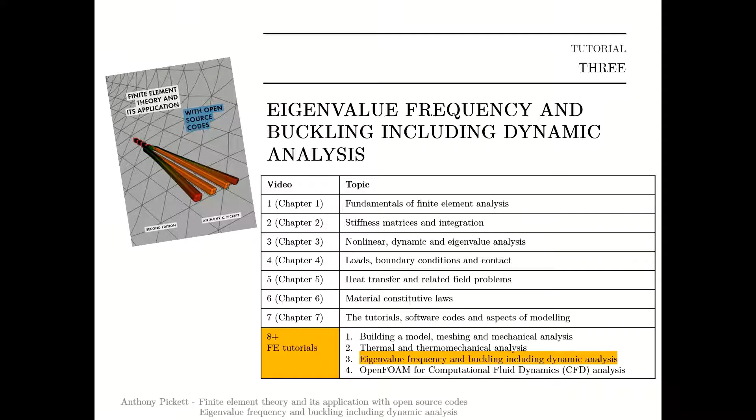I'll go through some description of the problems first of all and some background theory before moving on to the main part of the tutorial in using the codes. Then I'll do the frequency tutorial.

For this I've selected a tuning fork, an example I use in the book. It allows me to show you a little bit more of the CAD capabilities in FreeCAD. Then I'll move on and do a linear eigenvalue frequency analysis of this tuning fork and follow that with a dynamic analysis of the part using implicit direct integration, and can show you that we can get the same sort of frequency behavior as we can with a linear eigenvalue analysis.

Finally, then I'll move on to the buckling part of the tutorial, which uses a thin-walled box section loaded like a cantilever beam. One end of it is built in and the other end is loaded. I'll show you quickly how to build the CAD model, and then we'll do the linear eigenvalue analysis.

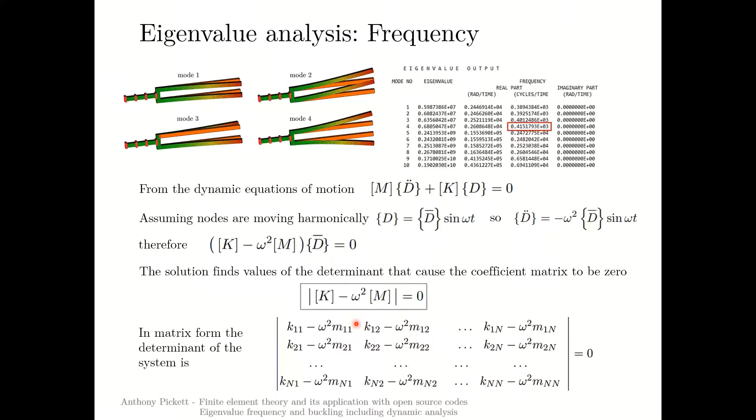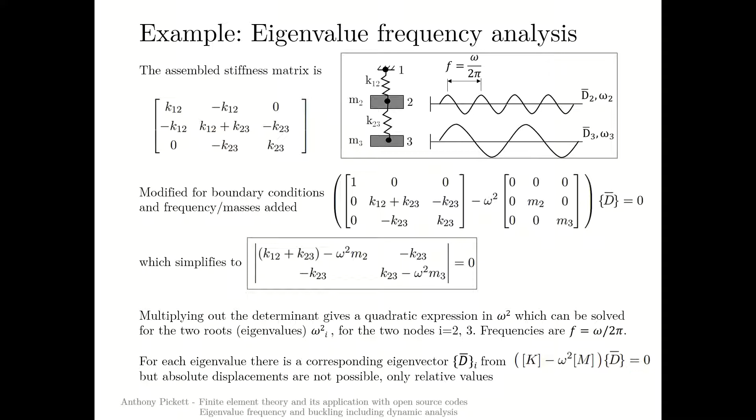Dynamic analysis can also be used for vibration problems. So, for example, this tuning fork could also be analyzed as a dynamic analysis, although you won't be able to very easily extract information like frequencies. But it can be analyzed, and also it can be applied to problems like the section buckling problem that we're going to be looking at later in this tutorial.

I did cover dynamic analysis in the video on lecture 3, although I tended to focus on explicit finite element methods. I rather jumped over this direct integration method that we're going to be using here. It was also used in tutorial 2 for transient heat analysis, so if you are interested, you might want to look back at that.

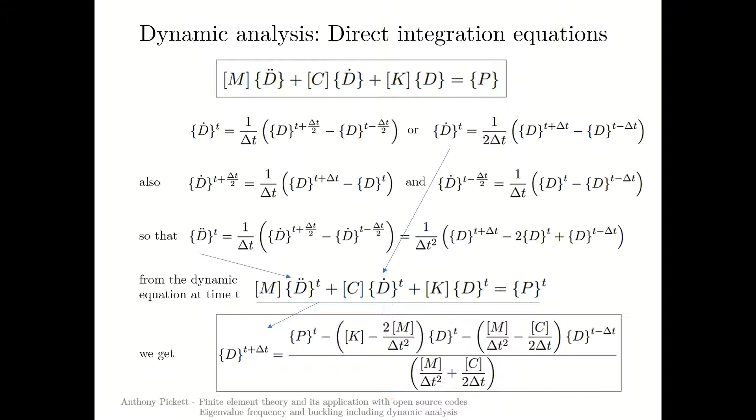On the next slide, I'll present the Newmark method, which applies these techniques. The direct integration method shown on the previous slide is used in Calculix, but in a slightly different form. It uses the Newmark method, which is actually a variation of the Hughes, or Hilber-Hughes-Taylor, HHT method. I'll quickly explain each of these.

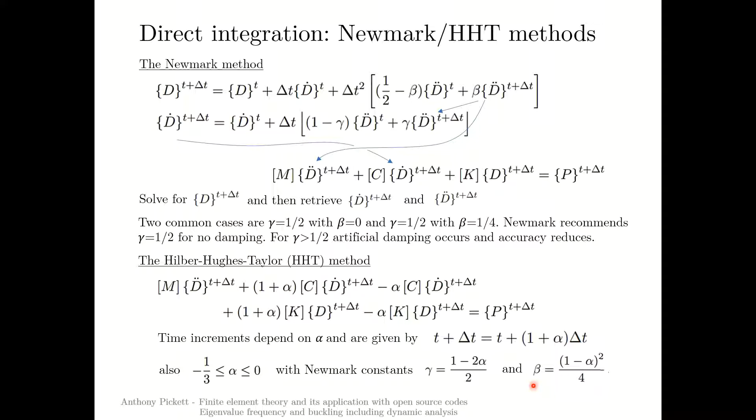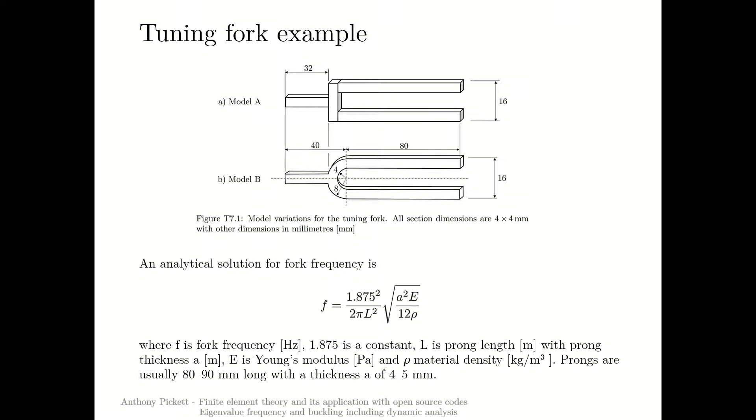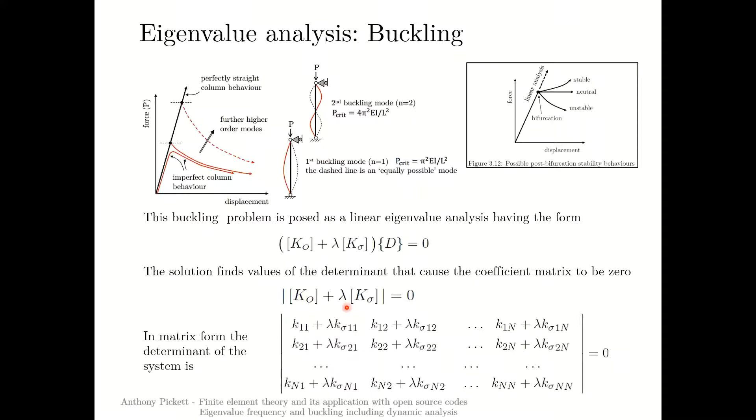That's a quick introduction. I'll move on in this tutorial now to use FreeCAD and Calculix for this frequency analysis.

First of all, I'm going to create the CAD geometry for this tuning fork. I've started FreeCAD - I'm using version 20, as you can see here. I had troubles with version 19.3; there's a known bug for frequency analysis with that version, so I'm using version 20. As I say, it's the beta version, should become the standard version soon. If you need to use this version, you have to download it from the FreeCAD website - it is not the standard, as I say it's the beta. Download the complete directory to your PC, and then you have to start the executable in the bin directory.

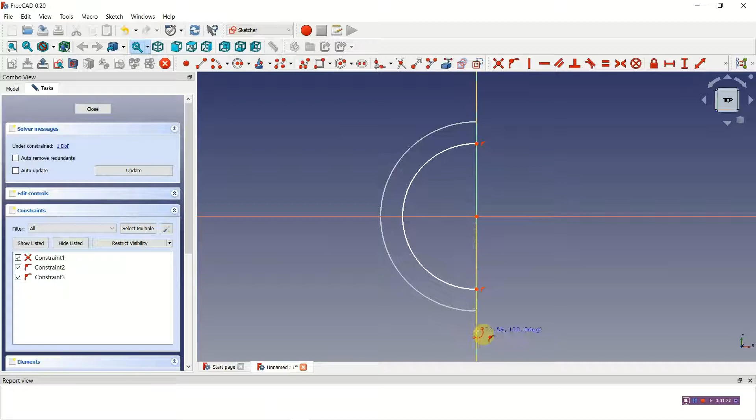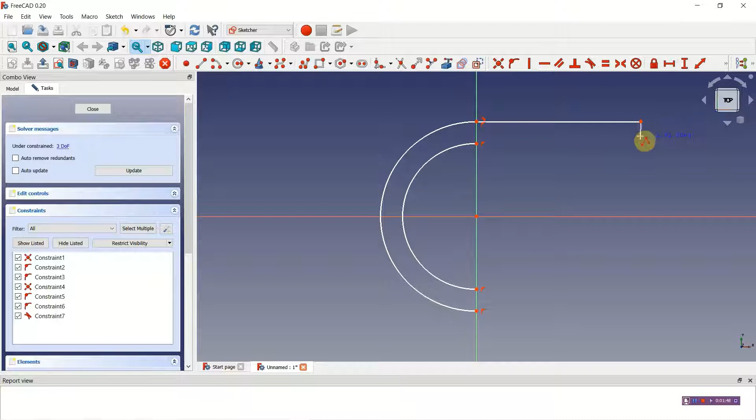Can we stop with the right mouse key? I'll then use this option here for a polyline. We create, go over the point - when it changes color, it means it's kind of tied together. Come out in a straight line to any point actually down. When it is a straight line, you get this vertical constraint appear. So I'll click on here again and then back to this point, and then with the right mouse key to stop that. I'll do exactly the same for the lower point.

And again, the right mouse key to stop the operation. If you get very close to the point, it will connect the two, and it has automatically put in the constraints for a tangent at these particular points. We've got the vertical constraints here. I'll connect these two with an equality constraint.

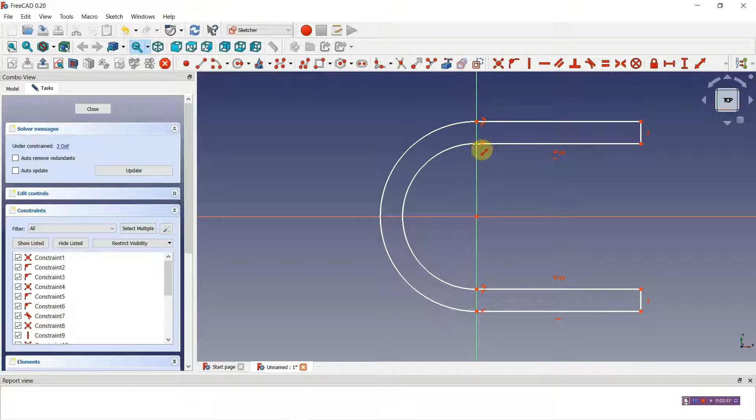And we can start dimensioning things. So I'll use this constraint here to specify that between this point and this point we have 8 millimeters.

And between this point and this point we have 16 millimeters. I'll specify that the length here from this point to here is 80 millimeters. Because of the constraint I introduced between these two, they both take, or both prongs as it were, take on the right length of 80 millimeters.

I'll create part of the handle. Just start with some point here, move out, trying to keep the lines vertical, and then back to this position here.

We could now use this trimming tool here to trim off these points. If you make a mistake, there is an undo option to correct things.

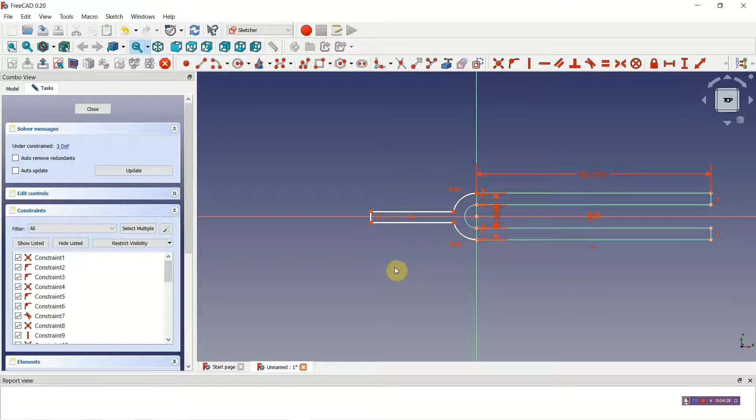They're connected. We want to have, well, they are parallel connected. Not sure on that.

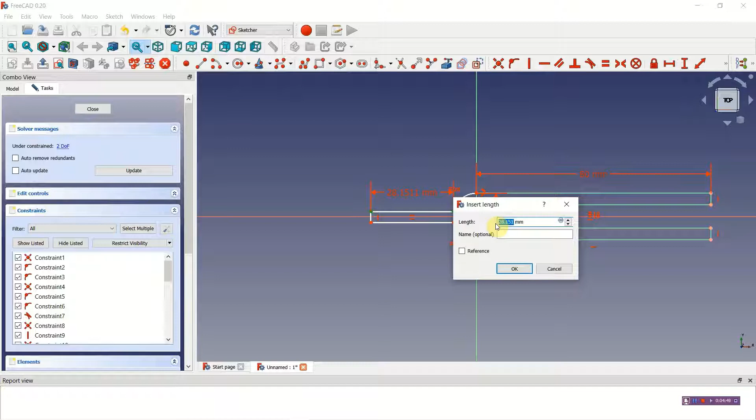Let's set the length here between here and here of let's say 35. I think in the original it was 40. Let's say 35. It doesn't make much difference.

And I'm going to create a handle, a little kind of grip at the end here using a circle. This is convenient for holding it. It's not really necessary for the frequency analysis or the eigenvalue frequency analysis, but it is convenient for a dynamic analysis I'm going to be doing.

So I'm just going to create something here. Sorry, I didn't do that correctly. Let me repeat that. From here outwards. And then I'll specify the size of that with the circle constraint.

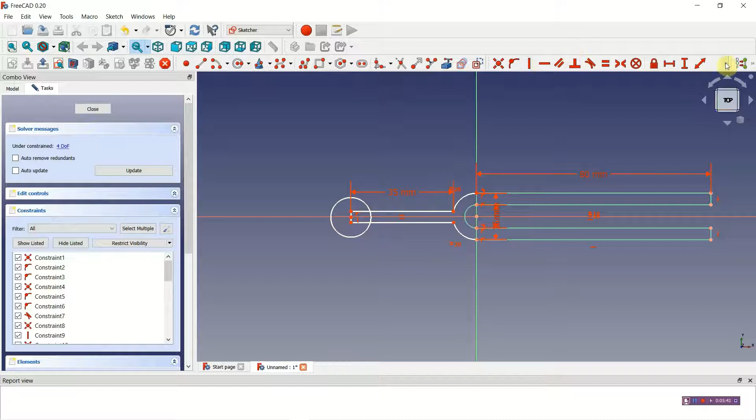We'll make it the radius, let's say 10. See how that looks. A bit large maybe. We'll make it 7.5.

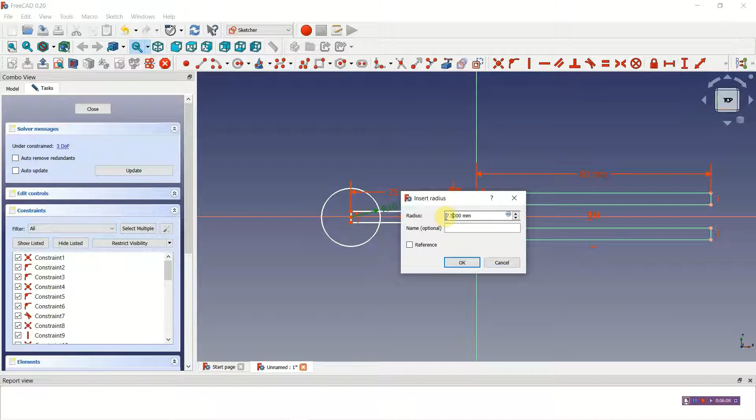Okay, again, we'll use the trimming tool. Sorry, here's the trimming tool to trim that. Right mouse key to stop the operation. I'll draw over that and then can just simply delete it with the delete key.

I need to make sure that this circle and also these two lines are really in the center. So I'm going to set a vertical distance between this point and this point, also between this point and this point of 2. So let me use this vertical distance constraint, which I haven't done properly, so I cancel that. I click these 2 points and then do the vertical constraint and put in 2 millimeters.

And I'll do the same between here and here, 2 millimeters. And I will do between the center of this one and here, also in the vertical distance of 0.

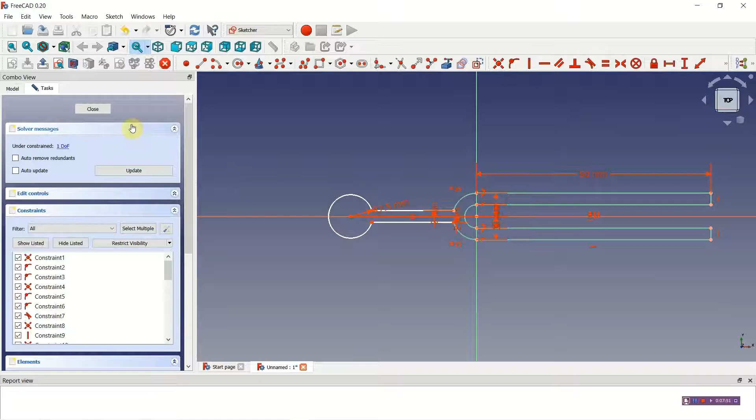So that should be the structure complete. We'll exit that using this operation here to leave the sketch. We can go into the part workbench now.

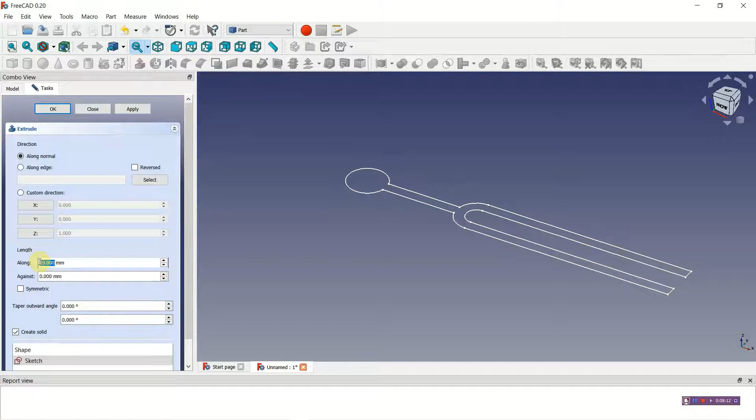And use the extrude operation with 4 millimeters. Each of these prongs is 4 by 4 in cross section, so we want to extrude this 4 millimeters. Apply, OK. So that's created a reasonable representation of this tuning fork with a prong length here of 80 millimeters.

You could make this a bit more elegant, perhaps by going into this filleting operation, and you can get curvatures on these parts to make it look quite nice. But I'm going to leave it like that because some of the analyses I will be doing will be computationally a bit expensive. They will require some computer time. So I need a fairly coarse mesh, and I think I'd like to keep the geometry as simple as possible.

I'll now go into the FEM workbench, set up an analysis container. So we've got our solver here. I'll just click onto the part.

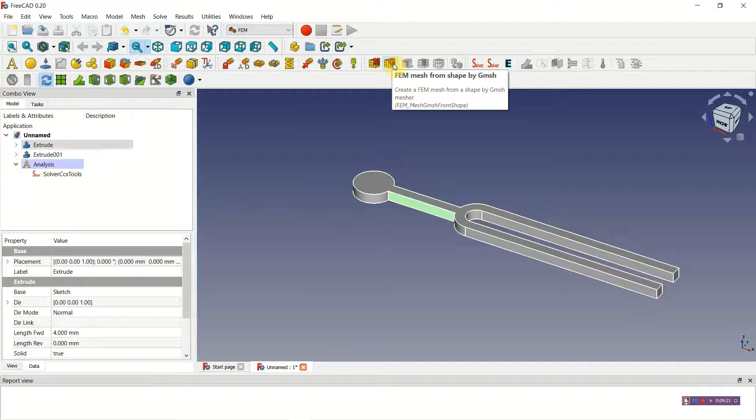We've got the Gmsh or the NetGen mesher. I'll try Gmsh first, see what sort of a mesh that produces. Perhaps I'll use 2 millimeters. That allows me at least to have 2 elements through the thickness.

We'll have a look what that creates. And that is actually quite a good mesh, I would say. It's fairly coarse, but as I say, some of the analysis I would like to do are rather expensive, so I'd like a reasonably coarse mesh for that reason. I'm going to say, okay, we'll use that for the analysis.

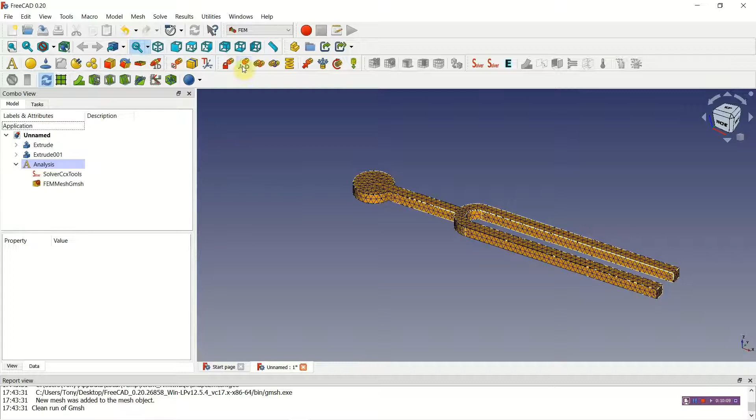So we can start defining a few boundary conditions and materials to do a frequency analysis. First of all, it's good to constrain it. I will fix the end. It's not absolutely essential for a linear eigenvalue frequency analysis, but this will block rigid body modes. So we'll fix the handle.

And then I'll define a material. Now I'm going to use steel, that's in here under Calculix steel. Density is 7,900 kilograms per meter cube. These are in the FreeCAD units, which will be converted when we write out the data set for the analysis with Calculix. So we'll say OK.

And that's all I need to do for an eigenvalue frequency analysis. If I double click on here, I don't need any displacements or forces or loading. Double click on here, I'll select the directory. Well, let me cancel there first, I wanted to just check one thing down here.

It's quite good if we use the split option for the output, so it is active. The frequency information is also specified here. This is the range for frequencies, the highest limit, the lowest limit, and 10 modes. We will see this again on the input data set in a moment. That's fine then.

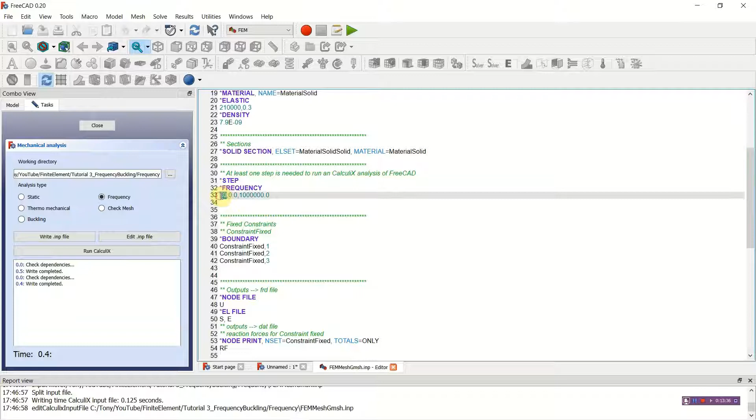It's a frequency within this analysis step. So the analysis step is down here to this point. We're doing a frequency analysis. We're selecting 10 modes. I could increase this to 20 or 30, but 10 for the first 10 eigenmodes and eigenvalues between 0 and this upper frequency. So it will be the 10 lowest that we'll collect or determine.

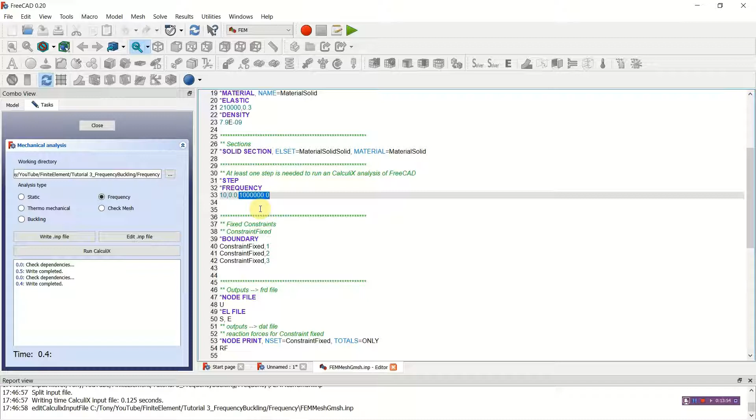That's fine, I will close this. There were no changes made. We'll run it, it will go fairly quickly, but I will stop the video for a moment while it's running. So total time 25 seconds.

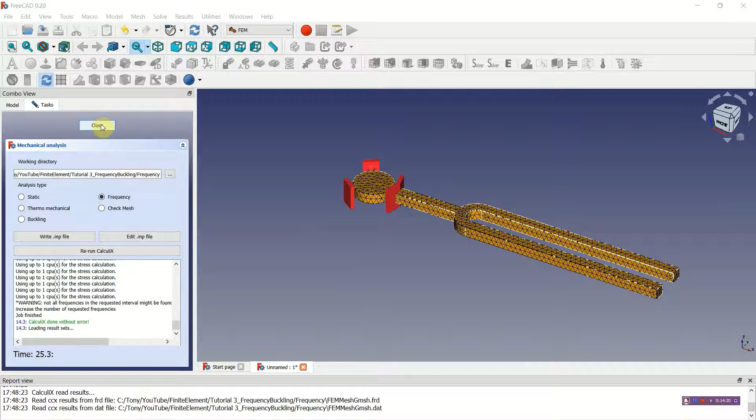We can look at the results now. We'll close this, and what you'll see here are the 10 eigenmodes for this particular problem. There will be no rigid body modes because we've constrained it.

So for example, if we double click on there, we can look at the displacements, and you will get some idea of magnitude of displacements, but keep in mind these are not, and you can see by the sizes here, these are not physical displacements. They are relative magnitudes. It's all we can get from an eigenvalue frequency analysis.

And these create a bit of a problem, because if we look into the deformations, it's kind of crazy. Unfortunately, there is still a bit of a problem here, but this is to say that is the mode. It's bending upwards here, and it will go backwards. We'll see this better in a moment in the CGX post-processor.

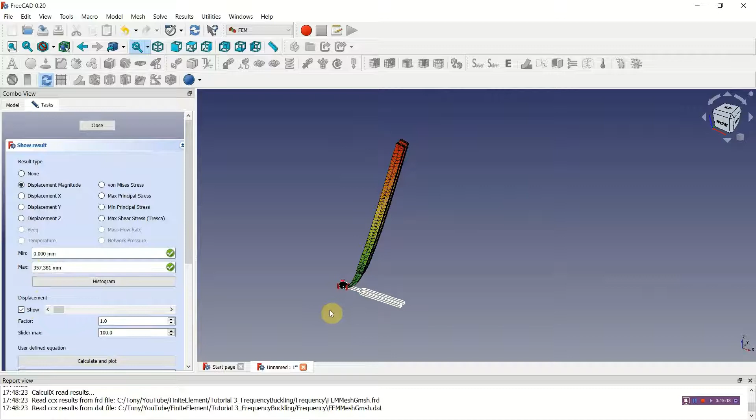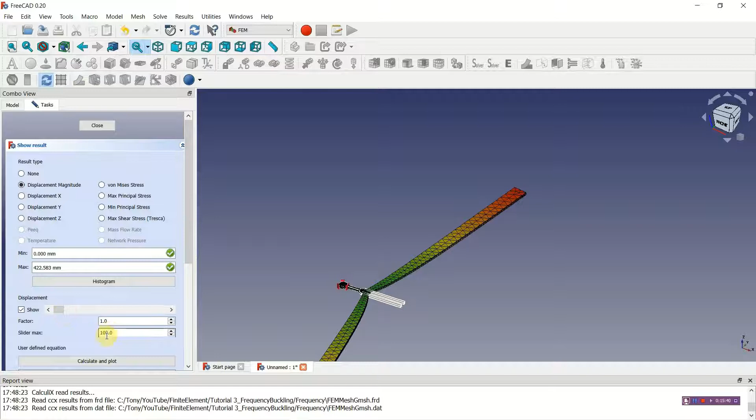We close that. I'll select another one, maybe the fourth. I think the fourth is the one that's most of interest for us, because this is the mode that corresponds to how a tuning fork should vibrate. We'll click on that, and again, well, I can probably, can I reduce this? No, I can't.

Okay, it's a bit better. So this is the vibration mode of a standard tuning fork, where these two prongs move symmetric about this center line.

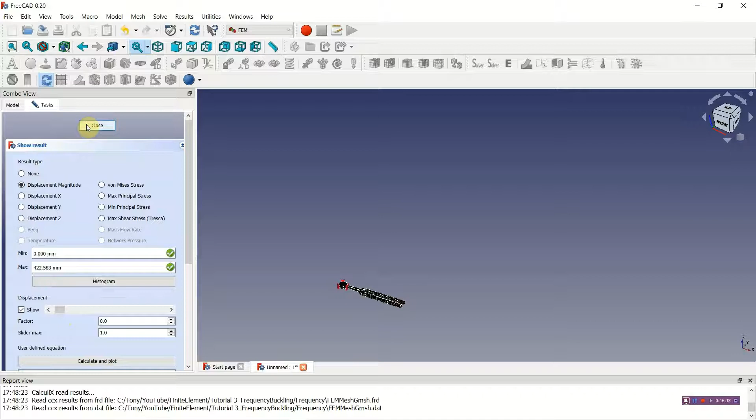We'll look at these in the CGX post-processor. In this DAT file, we can open this. Now these are the omega squared eigenvalues, these are the omega square rooted, or the omega values, and here is the frequency.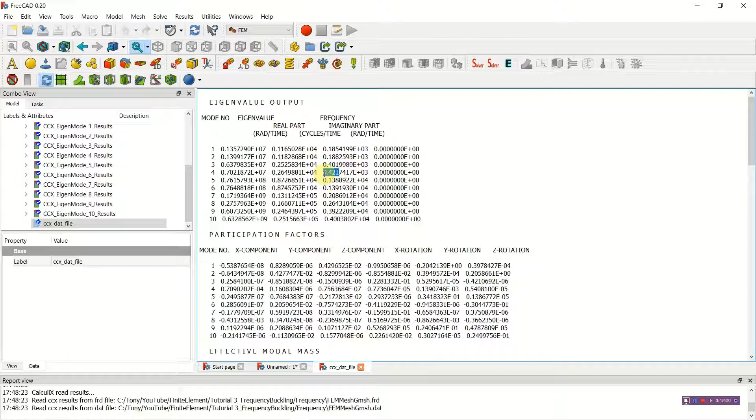So this first mode that I showed you is vibrating at 185 Hertz. The fourth mode, where the prongs are moving opposite to each other in the vibration mode of a tuning fork, is moving at 421 Hertz.

Let's take a quick look in the results file using the CGX Calculix post-processor. We have to open this FRD file. This is the one that's just been created. It's loading up the results.

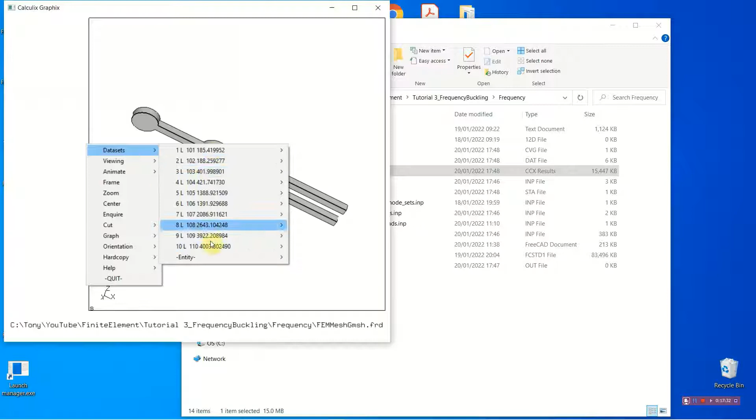I can select, well, here are the 10 modes. I'll select the fourth one, displacements, and the entity is the Y direction. And if we go under animate, start, you can see this mode.

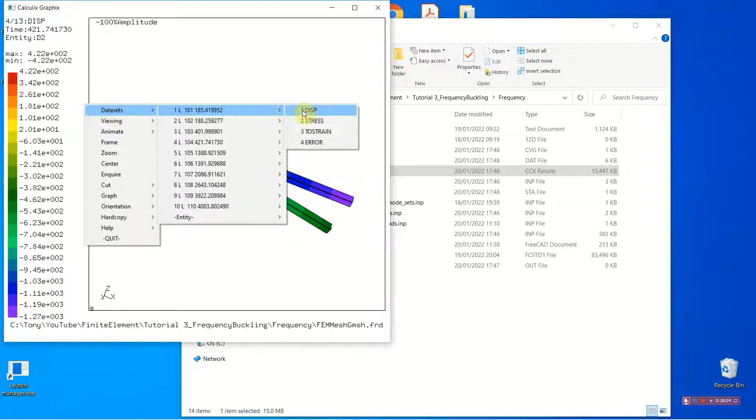We can have a look at that first mode again, just out of interest. Displacement, and then you have to select the D2 for the Y direction, and then animate start. So you can see this vibration mode.

Now these first three modes would not happen in practice really, because we tend to strike the tuning fork from underneath, and then it starts this mode 4 that I just showed you. These modes are not likely to develop.

If they did develop, what would happen is, because you've got this movement taking place here and you're holding it, these modes would be quickly damped. Whereas this mode 4, where one prong comes this way and the other prong comes this way, you've got no movement along this center. So if you're holding it, you're not actually damping the system at all.

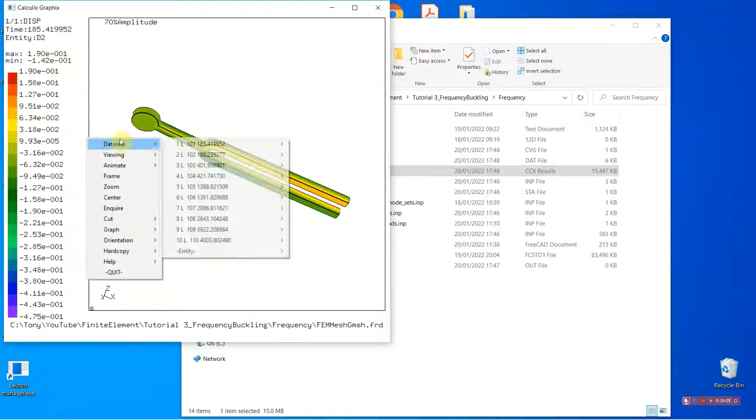Maybe just from interest, we can have a look at another mode. Let's have a look at this sixth one, see what it is. I have to do D2, and then we go under animate to start it.

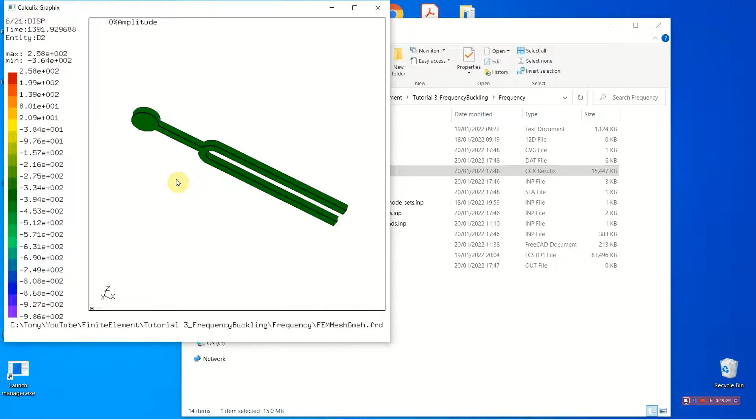Okay, again, this is a very unlikely mode to take place, considering the way it would be hit. And if it did take place, because you'd be holding it here, it would quickly damp.

So that's essentially an eigenvalue frequency analysis. The important point, as I was trying to show, is here is the information that you're interested in. These are the modes, these are the eigenvalues, and here are the frequencies. These frequencies are determined from this information.

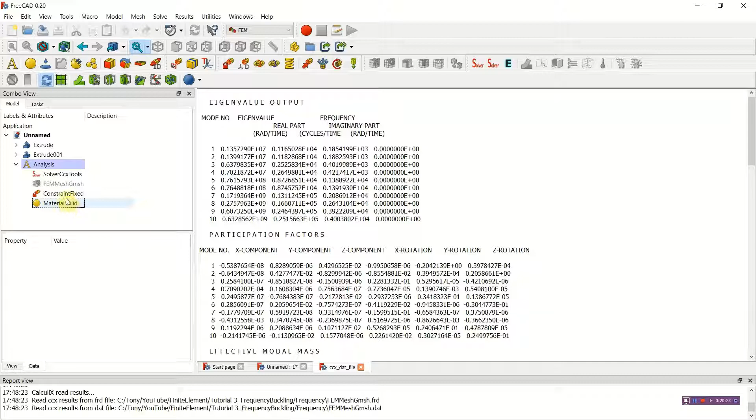We can close this up, and I think it's interesting, I can show you how we can do a dynamic analysis of this particular problem. I'll delete all the results, and we'll bring up the model again, center it.

With the eigenvalue frequency analysis, we don't actually have to apply any boundary conditions or any loading to the structure. The eigenmodes are determined from this instability criterion, which correspond to particular deformation modes. I did, in the linear eigenvalue analysis, impose some constraints, shown here, but these were only to suppress rigid body motions or eigenmodes associated with rigid body motions.

If we're doing a dynamic analysis of this problem, however, we do have to impose some kind of loading to deform the structure. I'm going to impose some forces. This direction here and this direction here could be either inward or outward, it doesn't really matter, but these forces will then create some deformation, and then you will get some oscillation started for each of these prongs. These oscillations, or the frequency from these oscillations, we'll try and compare with what we got from the linear eigenvalue analysis.

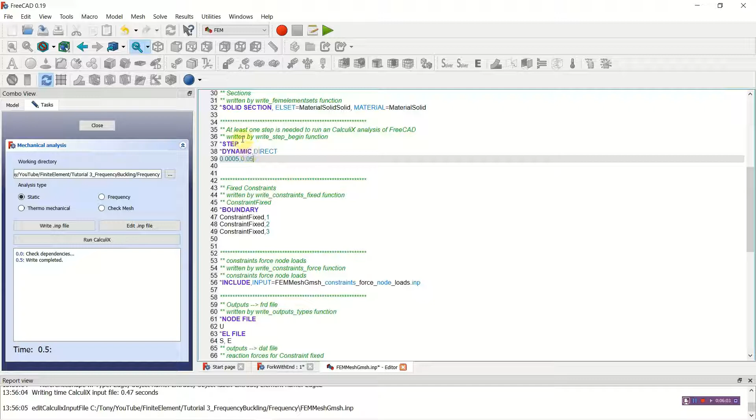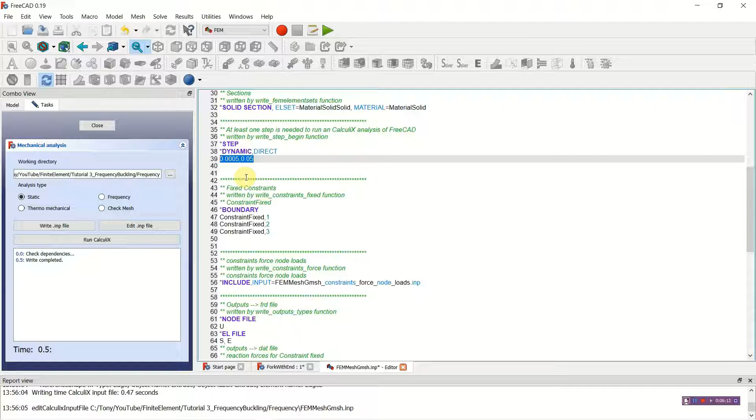It would be nice to do this for 1 full second, for example, but that takes quite a lot of computing time, and there will be an enormous amount of generated results files, especially with this time step. So I'm only analyzing for 0.05 of a second. This should produce 100 points of information for the behavior of this vibrating prong system. So those are the only changes.

We'll save it and run the analysis. Now this will take some time, several minutes, so I'm going to just stop the video and come back to it when it's complete. So the analysis has completed successfully, just over 5.5 minutes of computing time. We can have a look at the results, but they're not really very interesting here.

For example, you could click on one of these and have a look at the displacements. These are now, contrary to the linear eigenvalue analysis, correct displacements that we're seeing here, albeit for the loading we've applied, and usually we don't really know the loading, so we can't take too much notice of these displacements. This would be 0.07 millimeters, for example. We could also look at stresses created - main stresses are in here.

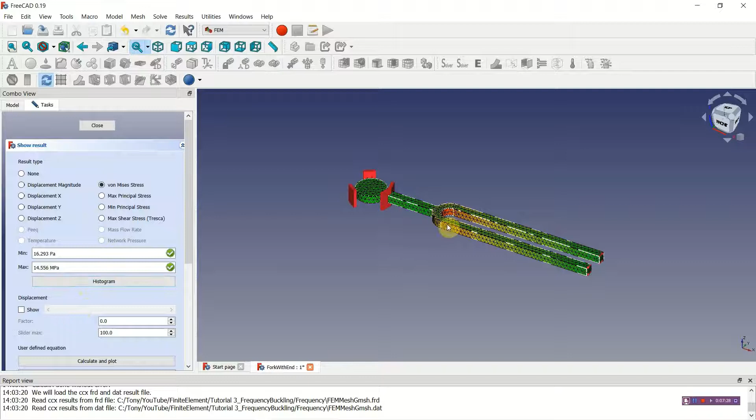But the more useful information is in the, or can be visualized from the Calculix CGX post processor. So I'm just going to close this, reduce this, and go into that directory and open this FRD file. Now this is the post processor for Calculix. I explained around the middle of the lecture, lecture 7 I think it was, how you can install this, at least on Windows. We'll double click on that.

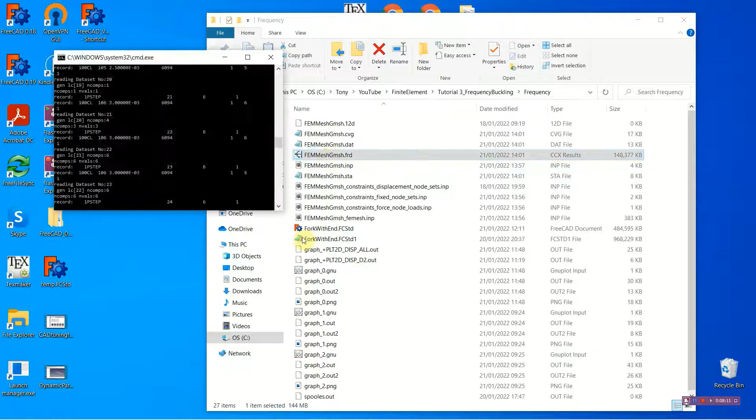This will take a little time to load up the file - there has to be 100 states to be loaded up. So we'll just wait for that. And here we see the structure. We can look at, well, the usual way - we would come in here and toggle data set to start to set up a sequence of the stored time steps. I will select the first one to start it, displacements.

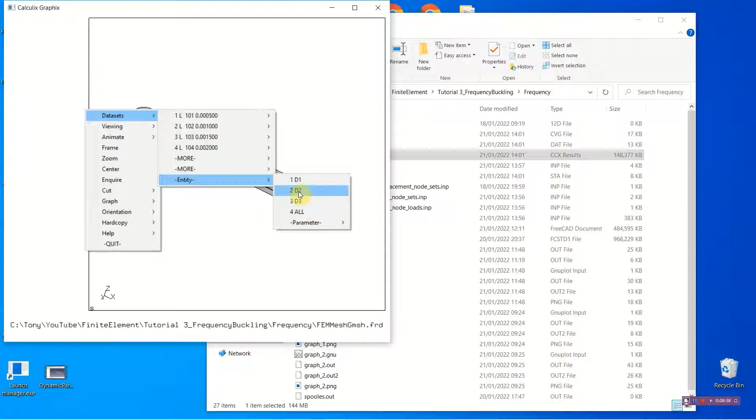I come back into that again, selecting here all. Well, no, I'll select D2 - this is the displacement in the vertical direction for this tuning fork. And we can see here contours of these displacements.

We can create a graph, time history graph. I'll select 2 nodes, better we shift that so we can see the information here. We'll select 1 node here and 1 node here. Right mouse key to stop that. And these then are our displacements for the 2 nodes oscillating.

We can see we've got, let me just count them, 1, 2, 3, 4, 5, 6, 7, 8, 9, 10, 11, 12, 13, 14, 15, 16, 17, 18 oscillations over a time of 0.05 seconds. That means it would be, in terms of seconds, 360 Hertz. So the 360 is rather below the 420 we predicted from linear eigenvalue analysis, frequency analysis.

The main reason for this is we haven't used enough time steps in the direct integration process. There's also another problem we can see: the amplitudes are gradually reducing. This can be due to two things.

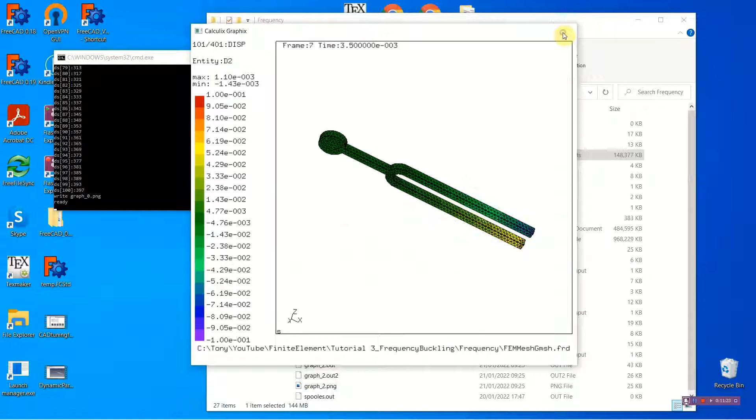We'll close this and open the file again. We'll delete all those results, and this result here has no meaning for us. And then under the solver, we'll come in here again and write out the input file again.

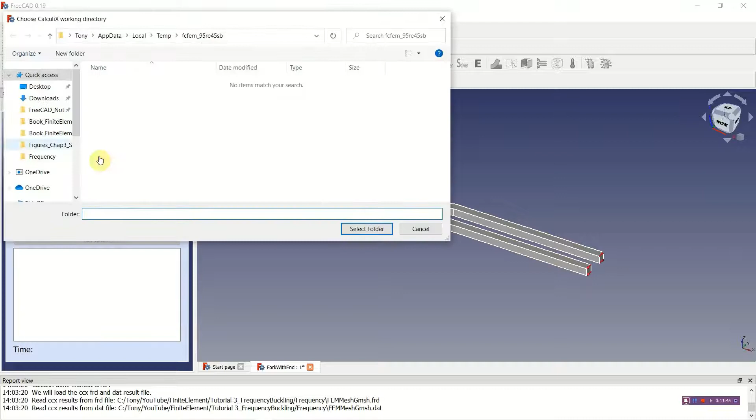Of course, I need to change it to the directory so I can store my results in a place I can easily find. We'll write out the input file, edit it. I have to do the same thing again.

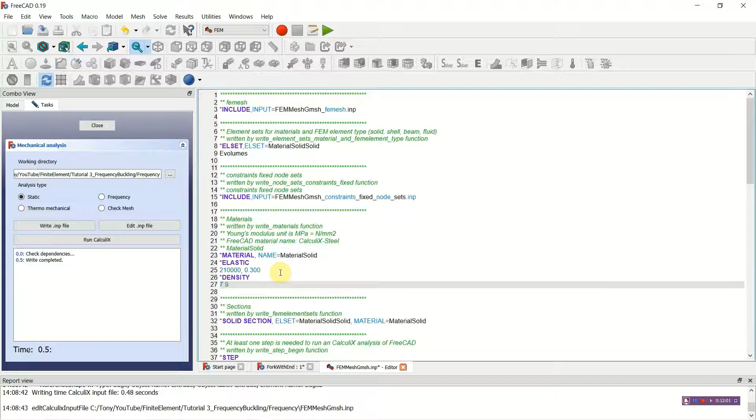Density 7.9 e to the minus 9, and here we will have dynamic direct integration, and we'll put in here 0.0001,

0.05. Now this is a much smaller time step. Previously it was 0.0005, giving us 100 points. Now we have 0.0001, giving us 500 points for the complete integration process.

We've got our time step. Another thing we have to enter here is increments equal some number over 500. The default is set to 100, so after 100 time steps it would have stopped the analysis. We now need to increase this default to 1000.

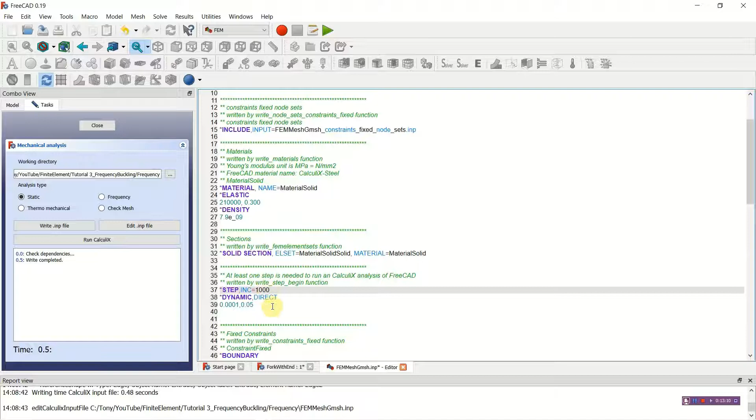So those are the only changes. We'll save this and run it. Now this will take... I have an error, edit input.

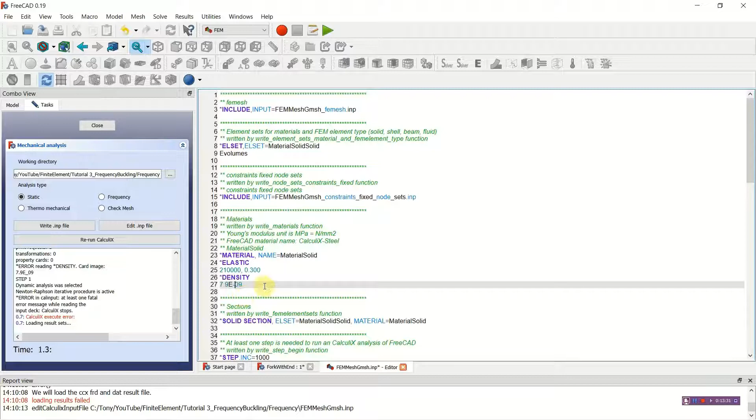What did I... 7.9 e to the minus, there's a typo there, minus 09. Okay, the rest is correct. So we'll save that and run it.

Okay, now it is running. I'm going to stop the video again because this takes 20 or 30 minutes to run, and then we'll have a look at those results.

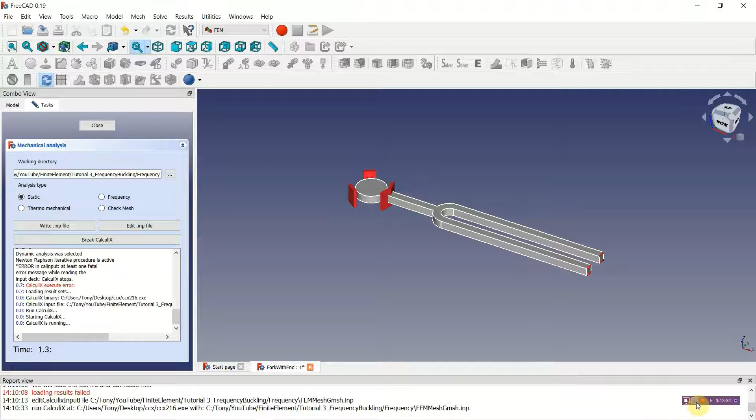The analysis this time has taken 25 minutes. You can see it here, and the analysis has been successful. There are all the results in here, so we could look at results here if we wanted to, but again it's more meaningful to look at these in the Calculix CGX post-processor.

So I'll reduce this and we'll look at the results here, opening this FRD file. This will also take a bit of time to load all these data sets, so I'll just stop the video for a moment. So the 500 states or points have been loaded.

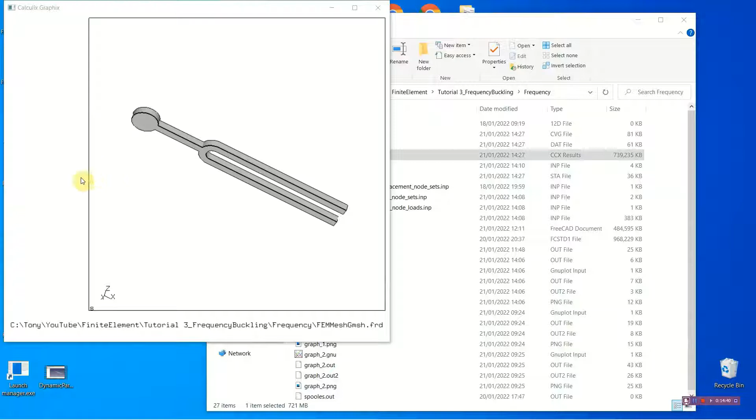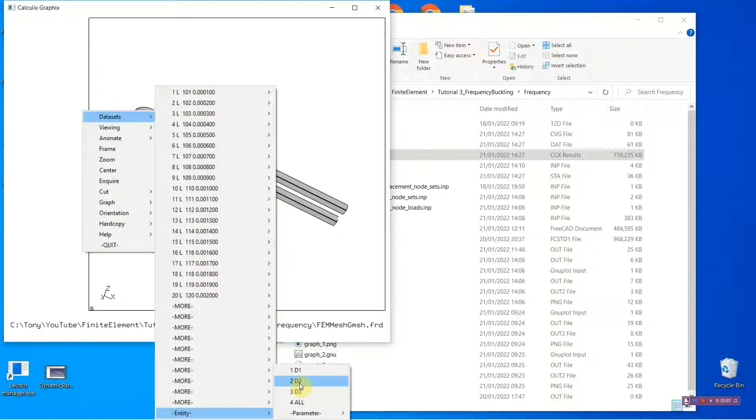We can follow the normal procedure, and we can toggle data set sequence, select the first state, displacement I'm going to take, and down here I have to then select the type of displacement. I'll use D2 again for the Y direction, and then

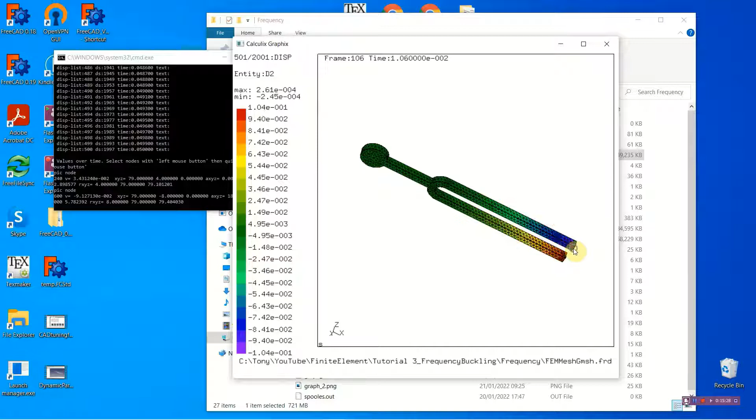we'll produce a graph of a couple of points. Move this across so that we can just check. So here's the first point, here's the second point on the two arms, with the right mouse key to stop that. And here now we see the much cleaner view of the oscillations, I would say.

As you can see, there's no decaying in the amplitude. In this time it indicates a much better solution. And let's just count here: 1, 2, 3, 4, 5, 6, 7, 8, 9, 10, 11, 12, 13, 14, 15, 16, 17, 18, 19, 20, 21.

So 21 peaks instead of 18 now. 21 over this time would be 420 Hertz. So that now agrees very closely with the result we had for the eigenvalue frequency analysis.

I hope it's clear. There's a very different solution method being used here to simulate this dynamic behavior, and very good results, or a good comparison.

You could compare these with the analytical formula I gave for a prong at the beginning, but you won't find such a good comparison there. I think the main reason is because the formula is really for a built-in cantilever, whereas we have this quite complex curved geometry which the prongs are attached to.

So it's a slightly unusual application for dynamic analysis, but I think it gives you some feeling how this works, and it's quite a critical analysis or problem, because we do have a high frequency behavior, and we can see that the number of peaks agree well - there's a kind of validation to the linear eigenvalue frequency analysis. I'm going to move on and show you how we do rather similar analyses for buckling, in the next part of this tutorial.

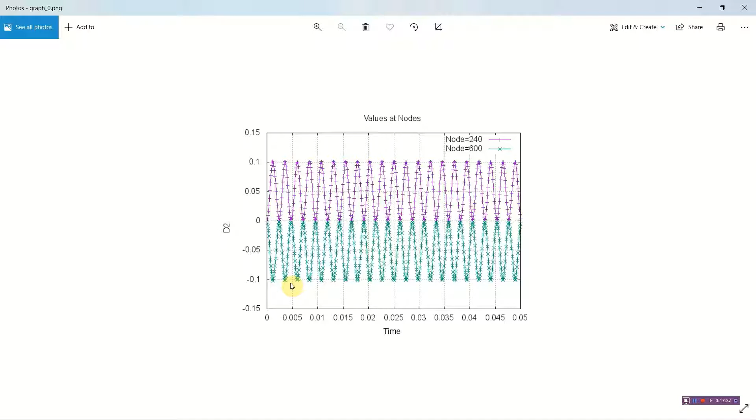So I'm going to do an eigenvalue buckling analysis. I'll create a thin-walled channel section, 500 long by 200 deep by 100 wide, which I'll fix at one end and load at the other end. Then we'll do this buckling analysis.

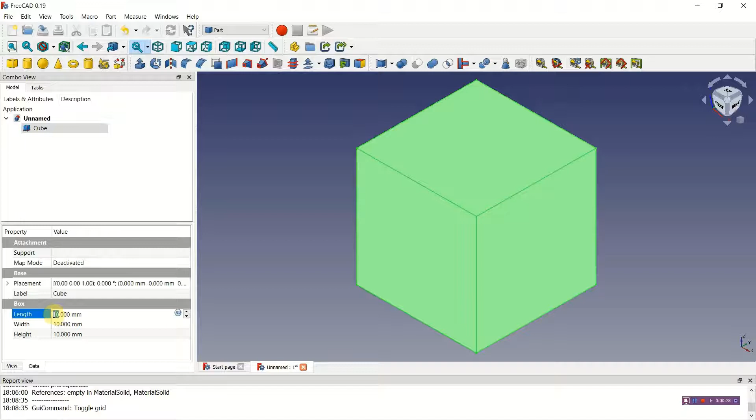One quick way, there are several ways you could define this section, but one quick way is to, under part, use the cube option to create the overall dimensions that you want for this section. So it's 500 long by width 100 and a height of 200. We can center that - so that's the overall dimensions.

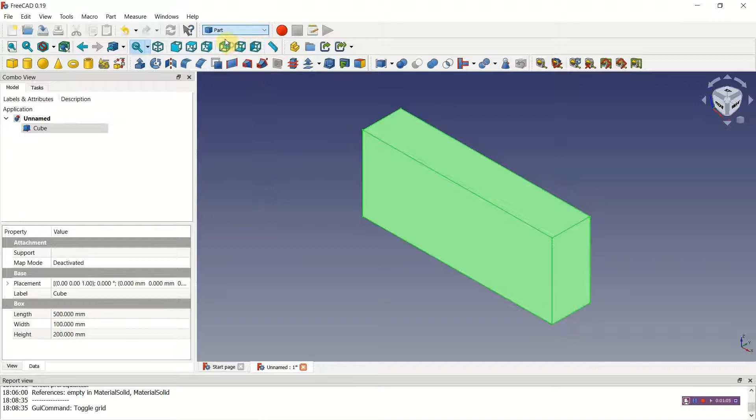Then under the draft workbench, we can use this face binder option to create faces for the channel section. So in that case, I want this one, then this one, I'll add them, and then I'll rotate around to get the other two, this one and this one, add them, and click OK.

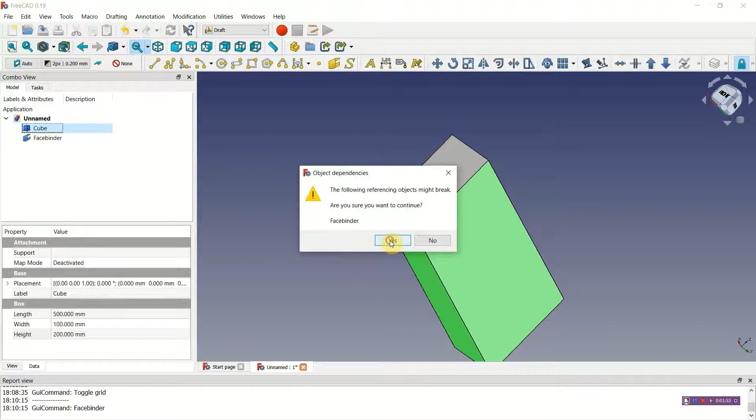Now if I delete the cube - sometimes this message can be dangerous, but in this case it's fine. We'll delete this, and what we're left with now, I'll try and just rotate this around - you can see the channel section.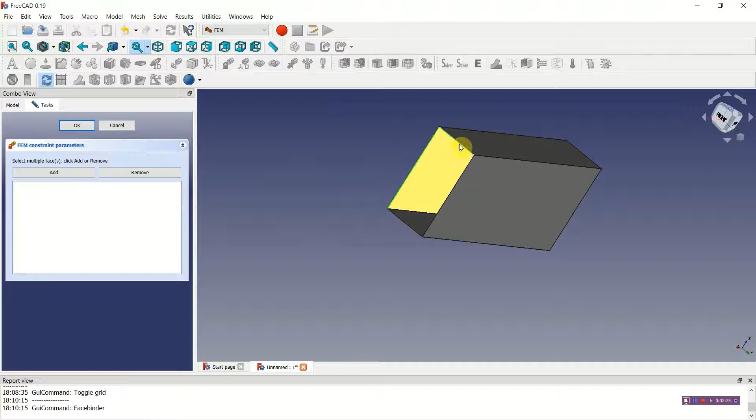I'll start the FEM workbench. We'll add an analysis container. I'll fix this end here using the constraint option. I'm holding down the control key, pressing on these, and then we'll say add and OK. So that end is completely fixed.

And on the other end, I'm going to apply a load or a force using this icon here. Click on the entity, add. It's in the wrong direction, so we use the reverse option here. And it hasn't quite done what I expected, so we'll use this entity in order to align the direction we want.

So that's fine, and I'm going to apply a load of 1 kilonewton, so 1000 Newton. Okay, so that's the loading and the constraint.

We have to define steel. I'm going to use Calculix steel. In the materials, most of that we didn't need, but we do need the modulus and the Poisson's ratio.

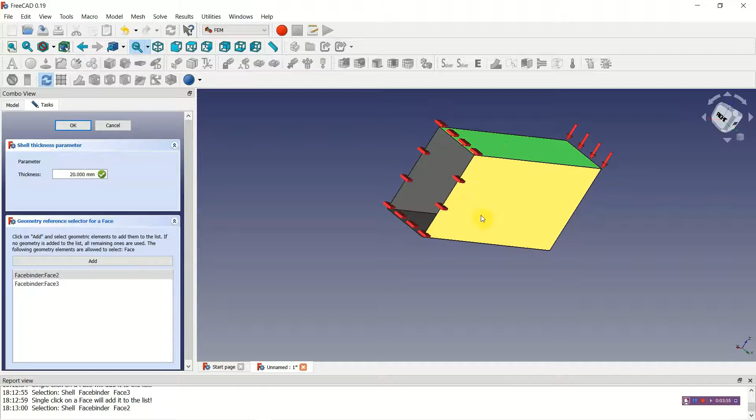Next, we have to define the thickness of the sheets. That's done here, one at a time. I've done this time, and I'm going to define them to be just 20 millimeters thick, so thin-walled section.

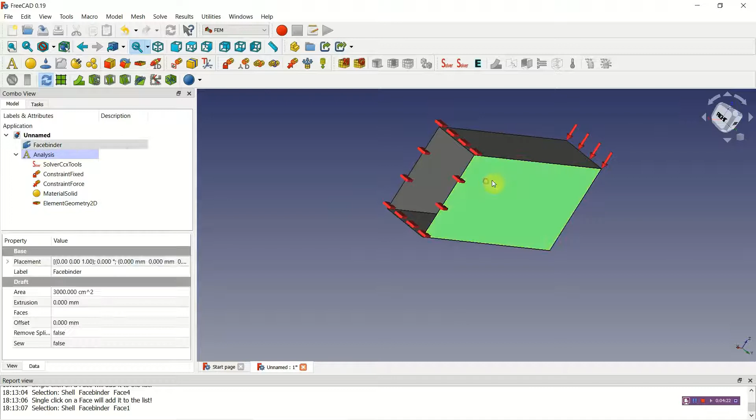Okay, and of course the last thing we have to do is to mesh this. So I'm going to click on that - we can use a Gmsh mesher. For example, if I use 10 millimeters and 10 millimeters here, apply, we get a mesh. It would be reasonable to use.

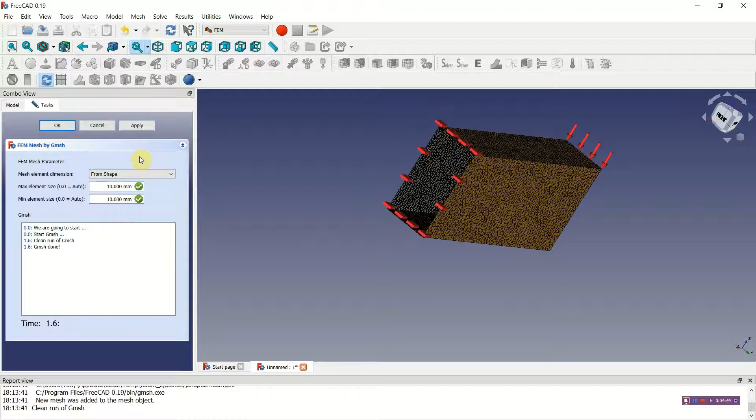It doesn't look particularly elegant, so I'd like to show something a little bit different here. If we cancel that mesh, and under the options for Gmsh, we can activate a different mesher. There's a range of meshers possible, but if we select the Del Quad mesher and now try to mesh it, we get a more structured mesh, but these are again triangles.

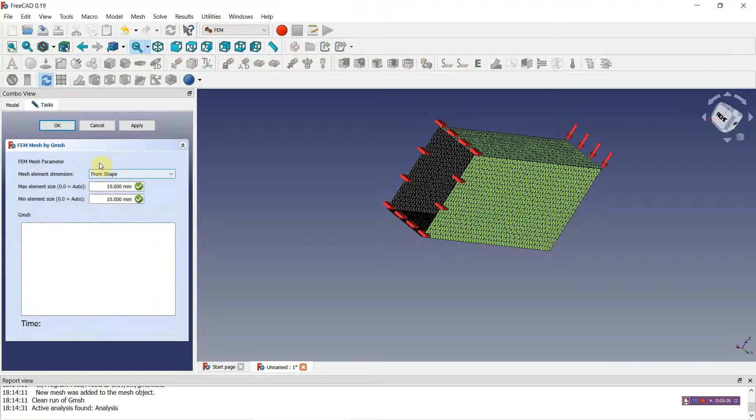So I should cancel that. And once more, under these options, you will see down here a recombine option. So I put true. We now can apply our mesh, and in this case, all those triangles will be recombined to give us quads, and we have quite a nice quad mesh for this structure.

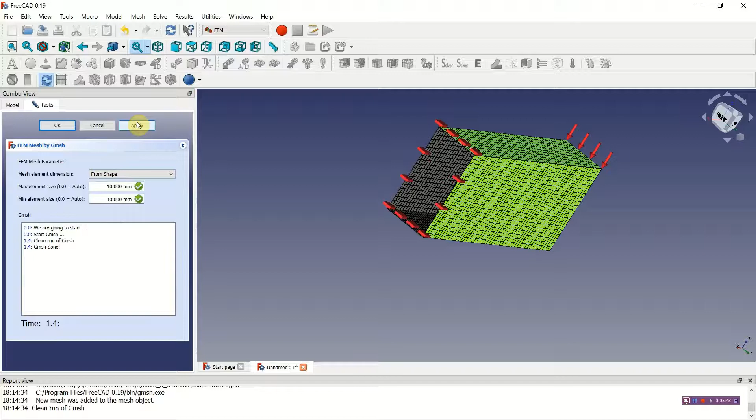Calculix has no problems analyzing these elements. So we'll say OK - that is everything defined now. We can go ahead and do the analysis.

As usual, it's quite good to specify a directory, and I've prepared one where we can store the results files. Otherwise, you can use the temporary directory, but if you wanted to look into that for any reason, then you've got to search through these temporary directories. Here, this one, I know where it is.

If you're using version 20 and above, I've seen that there is a buckling option in here which you would activate. I'm using version 19 here, so it's not available, so I'm going to use the static and modify things - write the input file, edit the input file, and in here, down here, what we have to change, this has to be replaced with buckle.

And on the next line, we have to enter in the number of eigenvalues or eigenmodes that we want to extract. So those are the only changes. We'll save this.

Now this shouldn't take too long, but I will just stop the video for a moment. So, 24 seconds for the analysis, calculation done without error. That's fine. We can close this now, and what we will see here are the 10 eigenmodes for the analysis, plus this results file. Now I'll look at this one first.

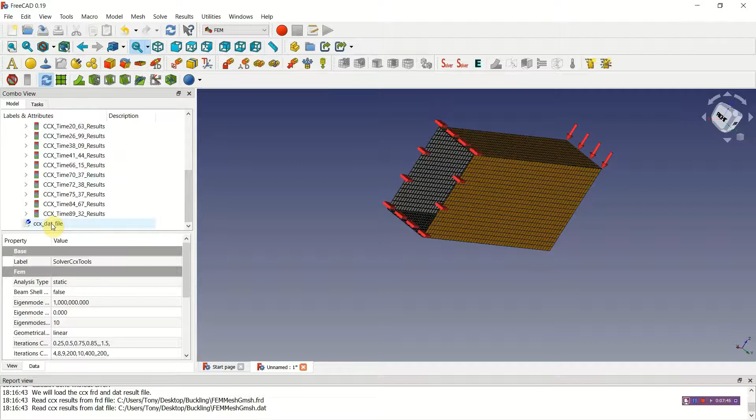What we're seeing here are the eigenvalues. Here we have a value of 20, so it's 0.2 times 10 raised to the power 2, so it's 20. And that means that the applied load, which was 1 kilonewton, has to be multiplied by 20, giving us 20 kilonewtons. And 20 kilonewtons would be the load causing this particular buckling to occur.

The next one's occurring at 26.99 kilonewtons, and the last one is at 89 kilonewtons. That's the only useful information in this file.

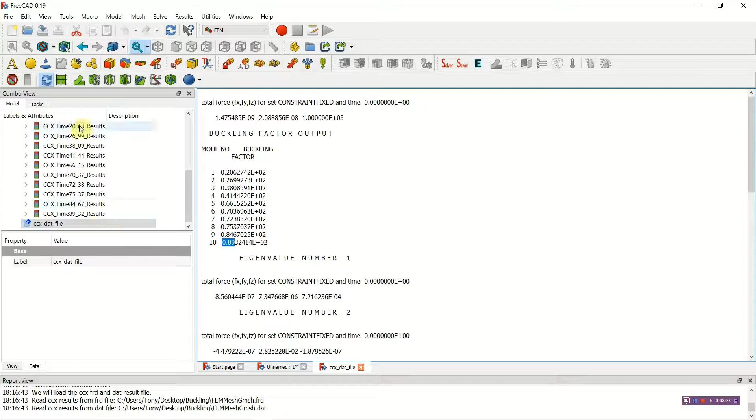We'll have a look at the first one. I'll double click on that. Displacement magnitude - we've got values for displacements, and if I was to come in here, we would have values for stresses. But these are not real displacements. They are all relative displacements to give us the eigenmodes.

Similarly, looking at the stresses, they correspond to these displacements, but they are not meaningful stresses. So we'll just look at the shape. I'll apply - well, we need to get a better view here.

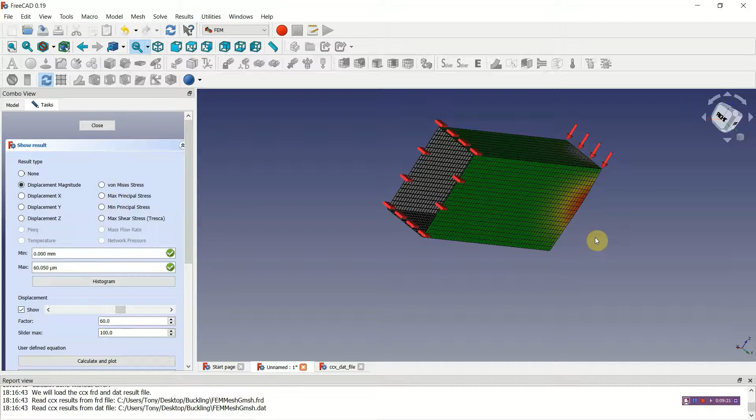So we can see it deforming slightly. It will be better to increase the scale here. And here you can see the buckling has taken shape. It's moving out this way, and because of that we get this deformation at the top, moving out again.

We'll have a look at the next one, see what that does, and we can see this alternative buckling mode. What was it? The first mode happens at something like 20 kilonewtons, and this was something like 26 kilonewtons.

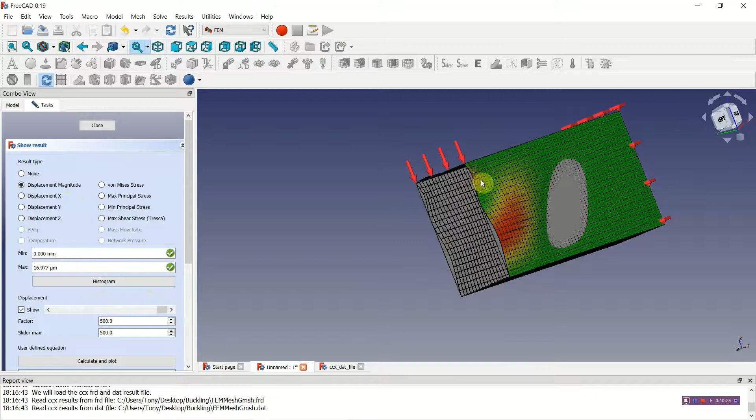Let's have a look at one of the latter ones. Yeah, that's quite a nice one. You can see this wave occurring here, and there's also a buckling occurring in this face.

You can also look at these results in the FRD file saved to that buckling directory. You look at that with the CGX post-processor from Calculix. The plots are maybe a little bit better, maybe a little bit more informative, but essentially that's the process for doing an eigenvalue analysis.

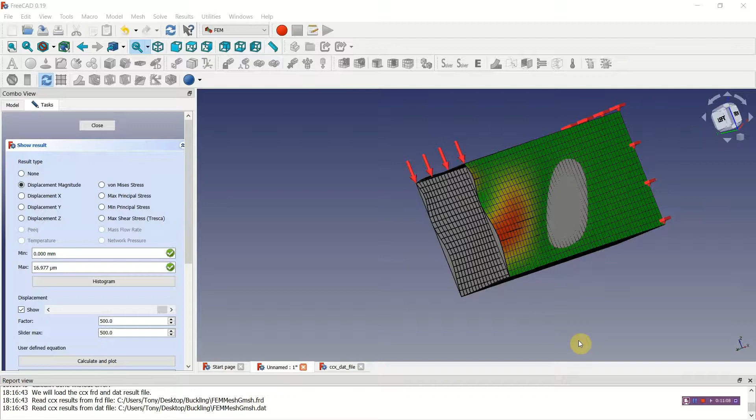The main disadvantage of this is that you don't usually know which of these modes is stable or unstable. It could have been - I don't think it would be the case in this particular study, but for example, if we look at this one, it could have been that this wouldn't cause an unstable problem. This mode could develop, and then some other buckling mode somewhere else is what would cause the structure to collapse. But looking at this, this is likely to be a critical buckling mode in this particular case.

If you really did want to study how a structure collapses, you could use direct integration methods. So we would do a similar approach using the same sort of options as the dynamic integration or direct integration in the frequency problem. You would apply displacements here, which would push down, I don't know, probably 50 millimeters maybe would be sufficient.

And you'd use a direct integration keyword. You'd have to have a certain amount of time. You wouldn't want to do this in 1 or 2 seconds because you will have inertia effects. You would probably want to analyze this over a slightly longer time, maybe 5 or 10 seconds. You will need a certain number of time steps to make sure you can properly follow or accurately follow the deformation process, and you don't have too many problems with convergence.